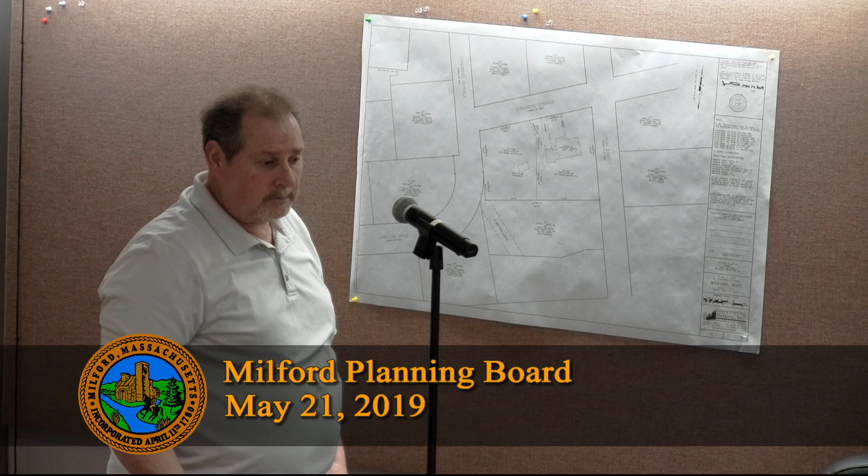Okay, let's go to the extension for Denaya Crossing.

Mike, you gonna just address that? There's nobody, Bob, are you gonna do anything about yours? No. That was not, no.

They just submitted a letter for the retaining walls, requesting an extension up to... they gave us a letter to, I believe, July 15th. Back in January, they submitted a similar letter to the board.

How many extensions on the walls have we given? We haven't, this is the first one. Okay, I'll make a motion. Yeah, it's been the weather we've had. Not much you can do.

Any problems, you think, Mike, with Grantham? No, you haven't had any problems up there with them, other than the normal. I would love to see the walls get built. I would too, but with the weather we've had, I can understand. Yeah, but if they followed the plan, theoretically, they'd already be built.

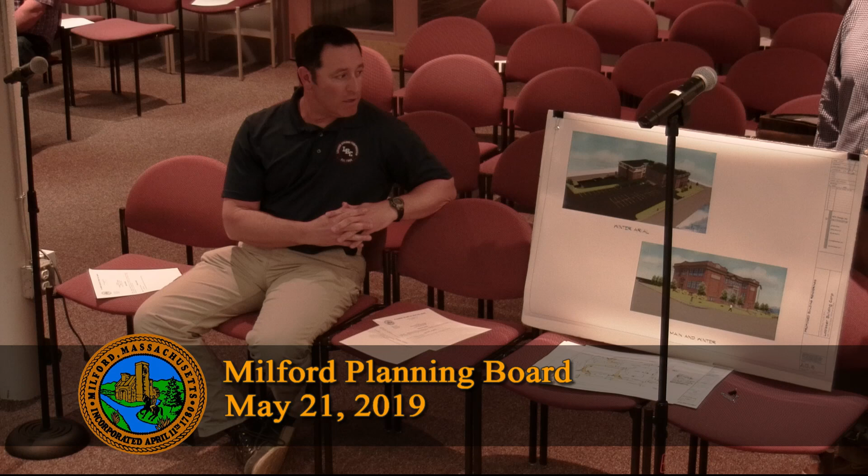We have full ADA access to both floors, whether through the switchback on the main street. We have 3 entrance points, all of which are ADA compliant. The actual access where the old building meets the new building is really going to be a focal point architecturally and landscape-wise, right on the main street.

Yeah, they can enter that, absolutely. I'm doing a whole ADA ramp on that side too. Oh yeah, okay.

The only thing I was looking at in the plans was the access to the elevators as far as moving vehicles, something that doesn't seem to flow that well there. For internal elevator use, if somebody's moving in, the moving truck, it's not that easy.

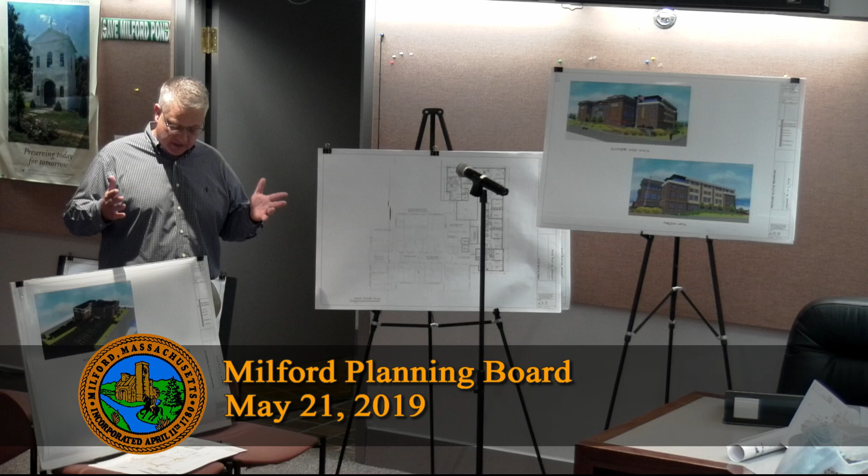We did widen that aisle from 24 to 28 feet, obviously for fire and emergency vehicles, but also for the garage spaces, so there's a little extra space to maneuver inside.

Don't forget, you can theoretically park on Sumner Street and Winter Street. Yeah, but even then, you're coming in through there.

You ever watch the movers in the city? I'm just saying, even in our new houses, the lawns are all perfectly manicured and planted, and they just drive up on the front lawn, sink in a foot, and say hey, fix it when we're done.

I had seen a school that was done for apartments, and they did have it so the elevator was fairly accessible for the movers.

I think one of the things we had here too was the fact that we were working with the elevators between the old building and the new building. We were trying our best to really keep the elevator as centrally located as possible in the building, so it really ends up being located kind of in the inner kink of where the 2 buildings come into play.

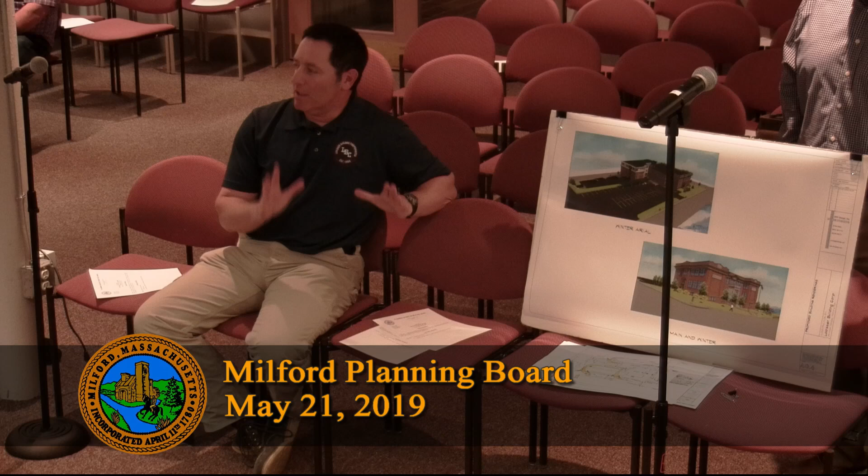Is that in the same area as the old one? Same area, but not the exact location. So now it goes up, grading down on the parking lot.

The grading in the parking lot in the back uses the garage walls as a retaining wall. Do you have the site plans? We do. Yeah, that was a water catch-all, so we're kind of taking the pressure off that space by filling it in, which makes perfect sense.

There'll be one tall garage. So as you know, topographically, that was just a water catch. We're going to flatten that out by bringing in fill and using the back edge of the garages as a retaining wall, an 8-foot retaining wall, all along the rear of those 9 garage spaces. Then the retaining wall will return around here to give daylight to the bottom story apartments. But this will all be very flat up against the building.

Just something I had. Any other questions, Joe? I have a couple. So what's better, living on the first floor or the second floor? The fourth, I think. That way you could see what's going on at Fino. Yeah, it's pretty neat, and if there's any line backed up at Dunkin' Donuts.

You want to just touch upon your request for waivers, please? Yeah, absolutely. First and foremost was the traffic waiver. We didn't feel a full traffic analysis was warranted, just based on the 2 use changes from a 300-student middle school to a 38-unit building.

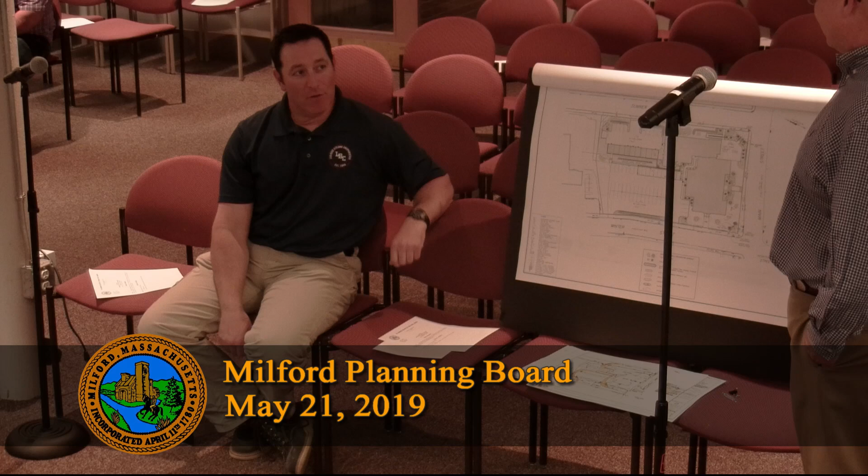I'm sure you're putting a ton of money in - the couple of trees aren't gonna kill you, that's all I'm truthfully saying. I didn't even see that diameter, and I'll do whatever we need to do in the landscape, because my intention is to make it look... Precisely, but I think it's a $10 million building when we're done. And I'd like to see the trees planted so that they're at a survival rate. I'm not asking you to transplant trees that are 100 feet tall to begin with, that's all I'm asking for.

We don't want something that's gonna grow and start tearing up the asphalt, your sidewalk, your parking. No, but if you notice the placement of the trees, I don't think that's gonna be an issue, but I'm looking for the higher survivability of the trees so that when the site's complete, it's gonna look move-in ready, so to speak.

So, 3.5 inch caliper? At least 4. Don't be fresh. Four's tough to plant, yeah. You have less of a survival rate with a 4 than you would with a smaller tree. The thing with the tree, the 2-inch will survive - 2.5 usually - it just takes an extra year or 2 years to start growing. It's there, it survives, it does well, but it just doesn't grow that fast. 3 then? Yeah, that makes sense.

Not that I'm a botanist, but just putting them in other subdivisions, I put in the 2-inch caliper, 2.5-inch caliper, and it just takes forever, a longer time for them to start the growth rate.

Anything else, Pat? I was just curious if they addressed Mike's concerns. Yeah, Mike had a couple of concerns that you can speak to. We added the drainage, right? Sure, is Mike first? Number one was in reference to the 2-foot radius curb returns at the access, and they changed that in this sketch that had come in. That was also referenced as one of the deputy chief's concerns as well, so it looks like they've opened them up and addressed that with this sketch.

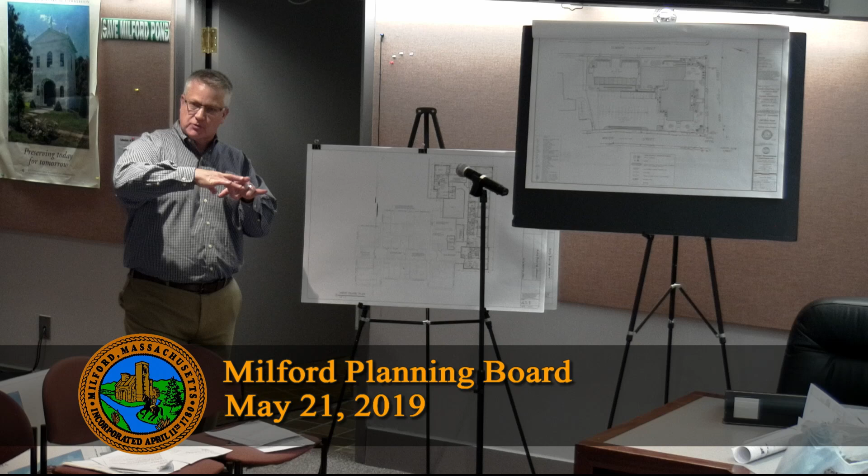It was hard to tell on the renderings, but what's the difference in elevation of the garage roof from the lower level parking to the top of the retaining wall we were just talking about?

Do you have a rough estimate? Give me those two points there. I think we have the elevations from the architect too. From the garage, the top of the roof at the back of the garage, the west side of the garage roof as it abuts the retaining wall?

I know they did sort of a flat roof, not a pitched roof. So they are showing that. I don't remember seeing anything. I was just curious what the drop was gonna be.

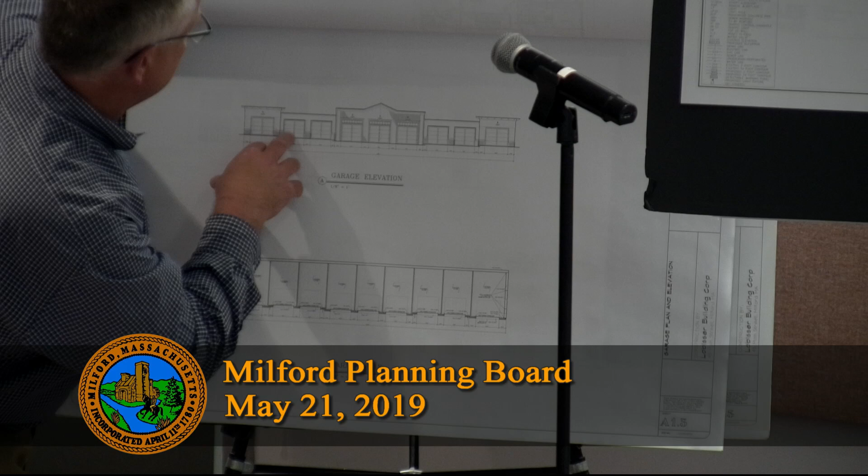I think it's about 9 feet. Or is it 8? It's still pourable, whatever that design comes out with - it's certainly pourable. So inside the garage space, to the top of the concrete is 8 feet.

So once they put on the decorative stuff out front, and they did a nice job kind of making it look architecturally not boring, they add another foot or two for the eaves.

No, but Larry's talking about behind the wall, where our swale is. You're still gonna need - so I believe it starts out at about 2 feet of concrete showing, correct?

And then as it goes towards our new building, it gets taller. But you're still gonna need a guardrail along the top of the entire length of the retaining wall. No, it's gonna be a handrail as opposed to a guardrail.

So it's a lawn area now. Yeah, so there's all along the plan, back here - yes. Larry, is it only gonna be 10 inches of concrete showing along the back?

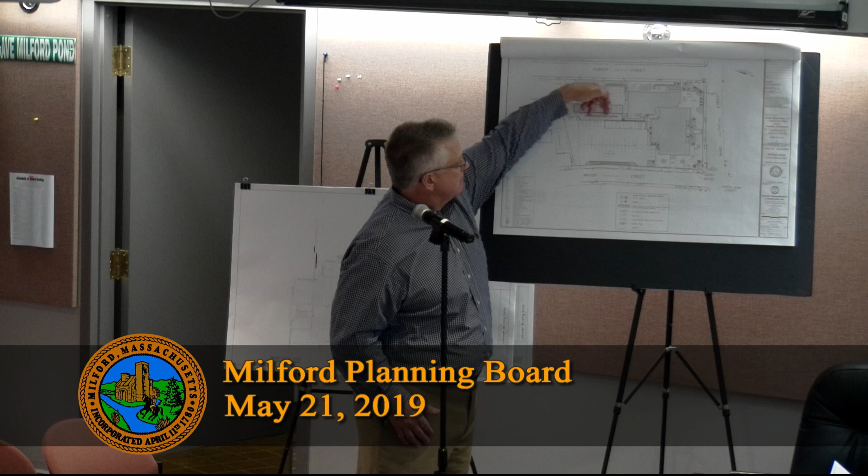But what's the drop from the top down to the roof? No, there's no drop, it's 10 inches up to the roof. All right, well that's what I was - yeah, so that keeps going higher.

So that's gonna affect how much guardrail they would need on the top of the wall. That's what I was trying to show - the guardrail's gonna be right here. It's actually backing right into the garage, Larry, so that's what I was trying to clarify for the board. Joe, anything else?

Okay, we got a letter from the water company. It tells you everything but what we want to know. I take it they're gonna give you the water because you already have an existing thing. All the rest of the stuff they want in, I could care less about. It's nothing to do with us whatsoever. So the water company is all right.

This being a public hearing, anybody in the audience have anything to say? Yes, sir. Give us your name and address. Jamie Wheelock, One Cuniff Ave, and I've been talking about this building for, I don't know, 2 years.

Wishing the process was handled differently, and maybe that's water under the bridge at this late date, so whatever. Hey, Patrick, I thought your idea for the 15-foot buffer or these wider dimension trees was great, though really I'd love to know if in fact the 15-foot buffer is mathematically impossible or they just don't want to do it.